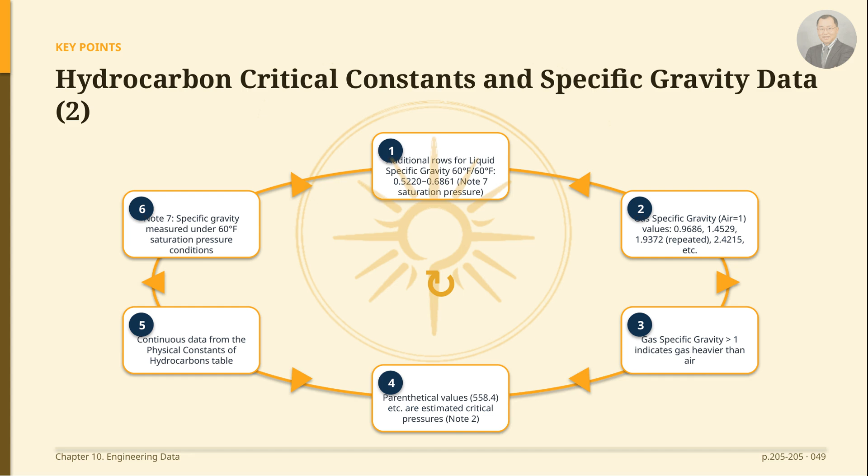Values in parentheses, such as 558.4, are estimated critical pressures. This set corresponds to the continued data of the hydrocarbon physical properties table.

I will introduce the boiling point column. This header is for the boiling point column, with a reference pressure of 14.696 psia and the unit in Fahrenheit. Since 14.696 psia corresponds to standard atmosphere pressure, or 1 atmosphere, the boiling point here refers to the temperature at which a liquid boils at atmospheric pressure.

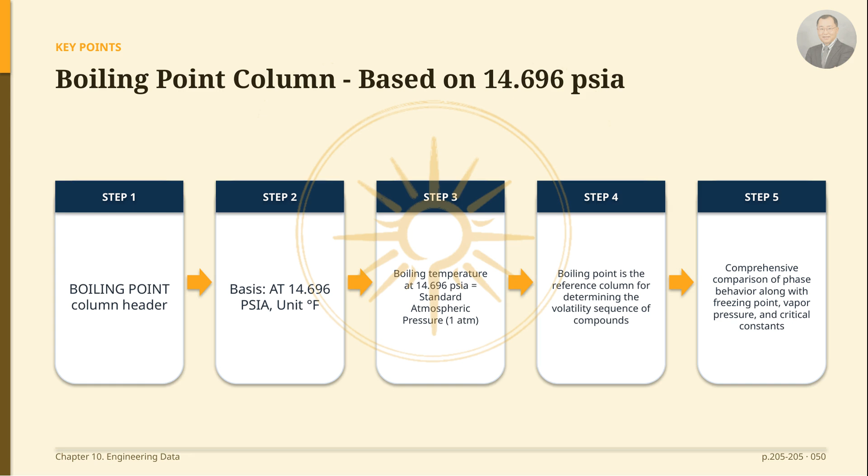The boiling point is the reference column for determining the volatility ranking of each hydrocarbon. When viewed together with the freezing point, vapor pressure, and critical constants, the phase behavior of a compound can be comprehensively compared. I will introduce the boiling point column within the hydrocarbon physical properties table of the engineering data chapter.

The header of this column specifies the reference pressure as 14.696 psia, which is standard atmospheric pressure, and lists the boiling point under that condition in Fahrenheit. Each hydrocarbon listed in the table, such as methane, ethane, and propane, has a boiling point value measured at this same 14.696 psia reference, so the table is structured to allow a direct comparison of the boiling points of different substances under the same pressure condition.

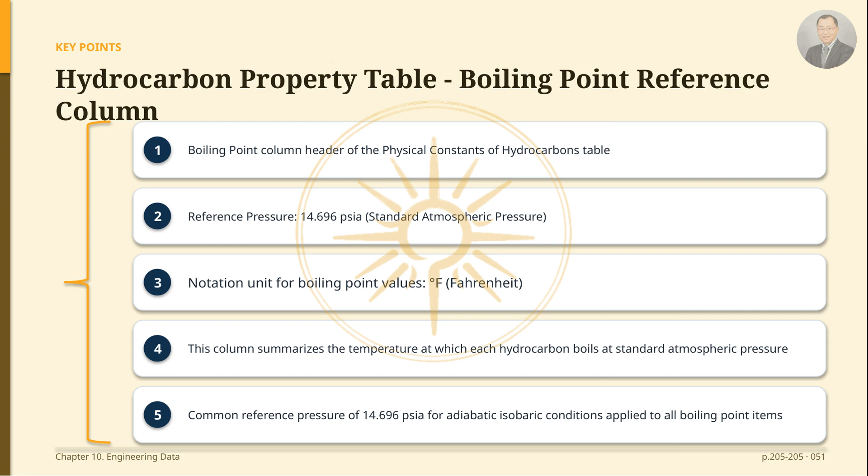This chunk summarizes the molecular weights and gas-specific gravity standards for aromatic hydrocarbons. Gas-specific gravity is expressed based on air equals 1 at 60 degrees Fahrenheit. Benzene has the chemical formula C6H6 with a molecular weight of 78.114. Toluene is C7H8 at 92.141, and ethylbenzene is C8H10 at 106.168. Interestingly, ortho, meta, and paraxylene all share the same formula, C8H10, and the same molecular weight of 106.168.

Additionally, acetylene is 26.038, styrene is 104.152, and isopropylbenzene is 120.195. The footnotes below the table distinguish the sources of the values.

Number 1 indicates calculated values. Number 2 in parentheses indicates estimated values. Number 5 refers to saturation pressure at the triple point, and number 6 refers to the sublimation point.

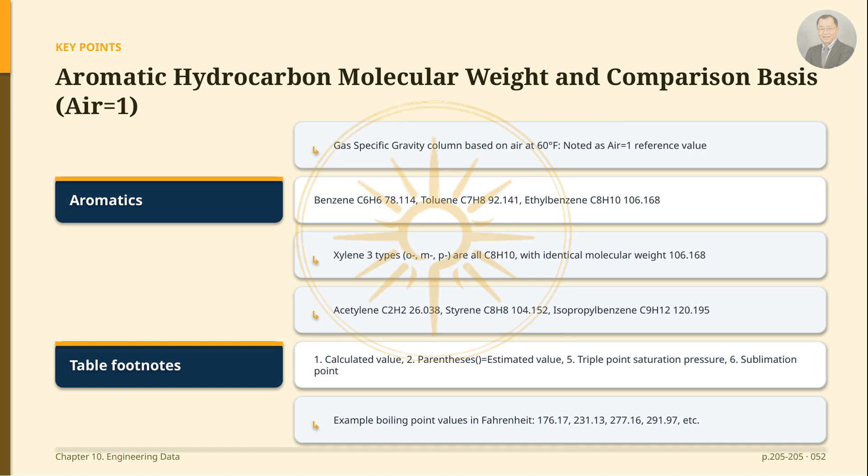Continuing in the same chunk, there is a table for the specific heat ratio of gases. The specific heat ratio, K, is the ratio of specific heat at constant pressure to specific heat at constant volume, and it is a key factor in valve sizing calculations for compressible fluids.

Acetylene is 1.38, air is 1.40, argon is 1.67, and butane is 1.17. Also, carbon monoxide is 1.40, carbon dioxide is 1.29, and ethane is 1.25. Helium is 1.66, hydrogen is 1.40, and methane is 1.26.

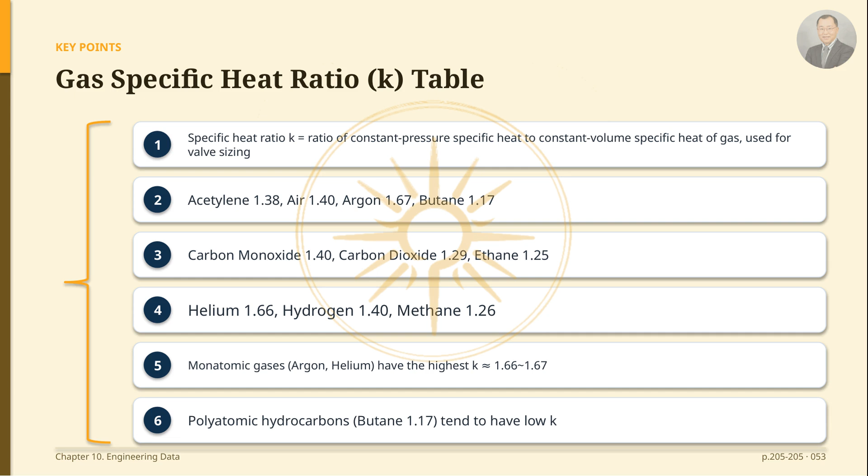Here, monatomic gases like argon and helium have the highest specific heat ratios, ranging from 1.66 to 1.67, while hydrocarbons with more atoms, such as butane, tend to have lower values around 1.17.

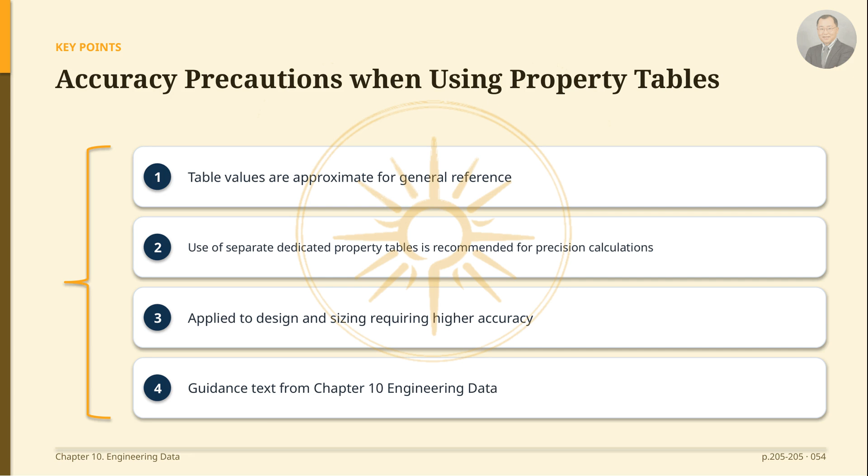This short chunk contains precautions when using property tables. Since the values in the hydrocarbon property table seen previously are general reference figures, it advises using dedicated property tables if higher accuracy is required. In other words, while these tables are acceptable for preliminary reviews, it is preferable to verify detailed property data specific to the substance for precise design or valve sizing calculations.

This chunk corresponds to the boiling point column header in the table summarizing critical constants and freezing points. Similar to the previous boiling point column, the reference pressure is set to 14.696 psia, which is standard atmospheric pressure, and the boiling point under that condition is expressed in degrees Fahrenheit.

In this table area, the boiling point is placed alongside critical temperature, critical pressure, and freezing point data, allowing for a side-by-side comparison of the phase behavior of each fluid.

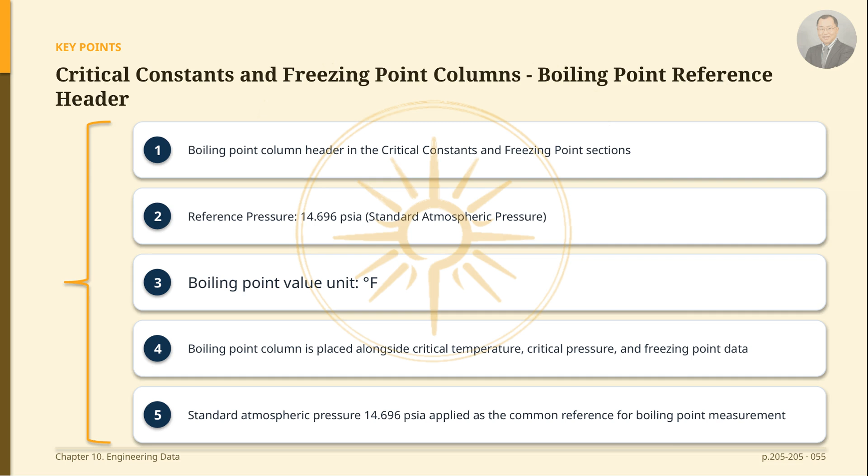This chunk refers to the header of the freezing point column and the subsequent vapor data column. The freezing point is also expressed in degrees Fahrenheit, with the reference pressure set to 14.696 psia, or standard atmospheric pressure. In the table, vapor-related data follows this freezing point column, providing comprehensive phase change temperature information for each fluid, along with the boiling point and critical constants seen earlier.

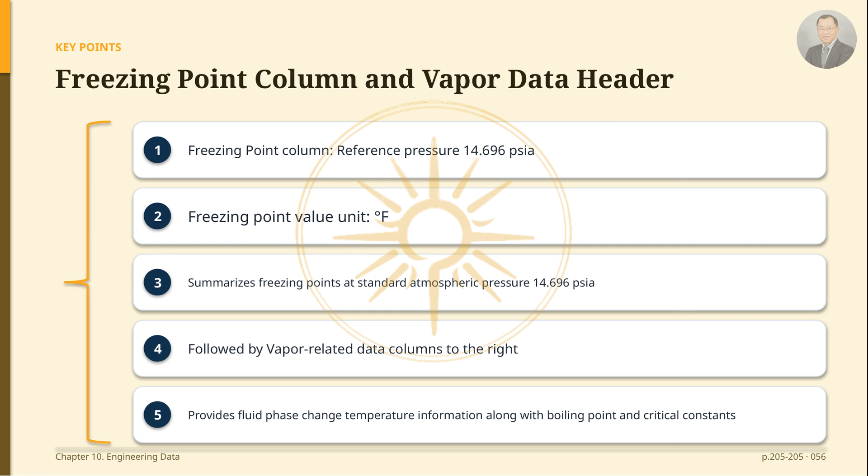This chunk is the header for the vapor pressure column. Vapor pressure uses 100 degrees Fahrenheit as the reference measurement temperature, and the unit is expressed in PSIA, which is absolute pressure. In the table, this vapor pressure data is placed after the freezing point and critical constant columns.

By comparing the vapor pressures of each fluid under the same condition of 100 degrees Fahrenheit, it can be used to estimate volatility and behavior related to cavitation and flashing.

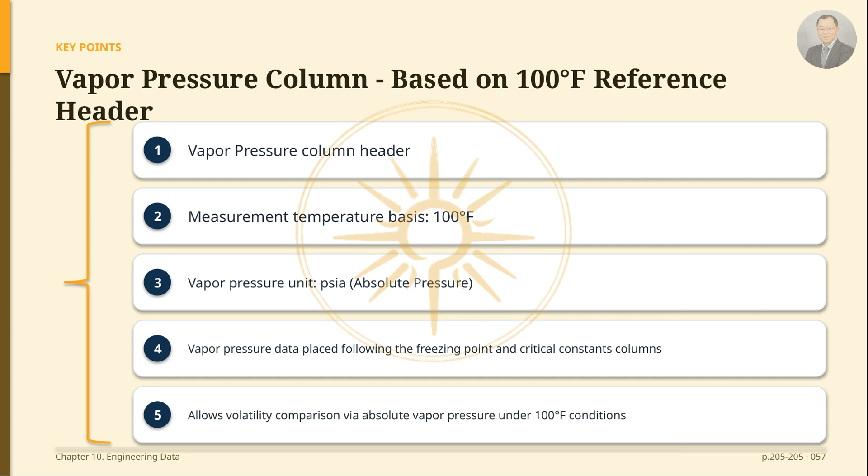Now, I would like to introduce the physical property tables for various fluids used in control valve sizing. This table presents the vapor pressure of each fluid at 100 degrees Fahrenheit in PSIA, while also summarizing critical pressure, critical temperature, and liquid-specific gravity.

Critical pressure is expressed in PSIA, and critical temperature is in degrees Fahrenheit. Liquid-specific gravity is shown as a ratio of 60 degrees Fahrenheit per 60 degrees Fahrenheit, meaning the liquid at 60 degrees Fahrenheit is compared to water at the same temperature. The critical temperature entries include negative values, with some as low as minus 140.8 degrees Fahrenheit.

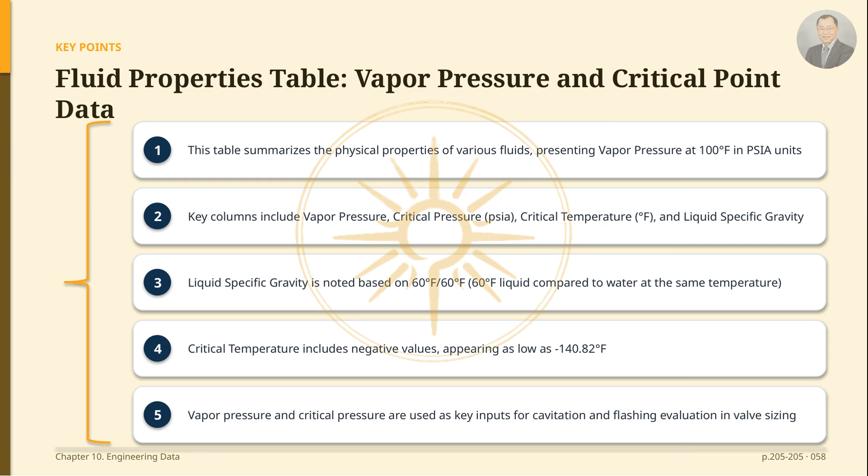These vapor pressures and critical pressures are important because they serve as key input values when evaluating cavitation or flashing phenomena in valves. Next, let's look at the key figures in the table.

Critical pressures range from approximately 465.4 PSIA to 706 PSIA, with values such as 552.2, 605.55, 651.24, 675, and 676.4 PSIA visible.

Vapor pressure at 100 degrees Fahrenheit ranges from about 0.188 to 3.224 PSIA, with more volatile fluids having higher values. Liquid-specific gravity, based on 60 degrees Fahrenheit per 60 degrees Fahrenheit, is between approximately 0.615 and 0.911, with most clustered between 0.86 and 0.91. Critical temperatures include both negative and positive values, from minus 140.8 degrees Fahrenheit to 55.86 degrees Fahrenheit.

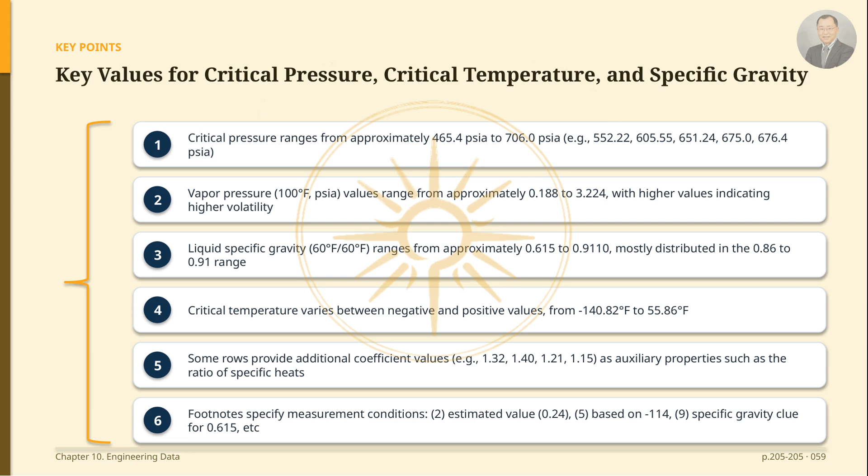Additionally, some rows provide auxiliary coefficients such as 1.32, 1.40, 1.21, and 1.15, which represent additional properties like the specific heat ratio. The footnotes in parentheses specify measurement conditions, such as number 2 being an estimated value of 0.24, number 5 being a reference value of minus 114, and number 9 providing a clue for the 0.615 specific gravity, so please check them when using the table.

I would like to introduce the concluding part of the previous hydrocarbon physical constants table. In this chunk, a specific heat ratio K value of 1.33 is presented at the end. The specific heat ratio K is the ratio of specific heat at constant pressure to specific heat at constant volume, and it is a key variable for correcting compressibility effects when calculating gas flow rates.

The preceding table summarized gases such as natural gas, nitrogen, oxygen, propane, propylene, and steam based on a specific gravity of 0.6, with the steam entry having a separate condition in footnote 1.

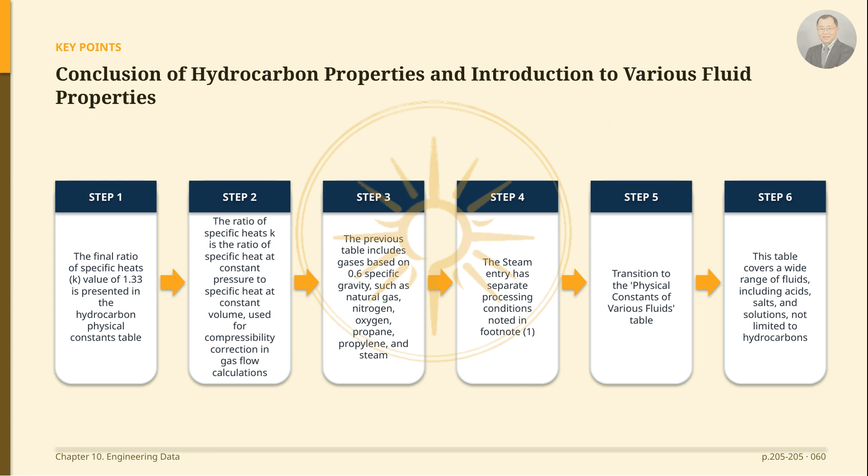From this point, we move to the physical constants of various fluids table. This table is characterized by covering a wide range of fluids, including acids, salts, and aqueous solutions, not just hydrocarbons.

I would like to introduce the boiling point header within the column structure of the physical constants table for various fluids. The first data column of this table is the boiling point. The reference pressure is 14.696 PSIA, which corresponds to standard atmospheric pressure. Temperatures are expressed in degrees Fahrenheit. Each row is categorized by the fluid name.

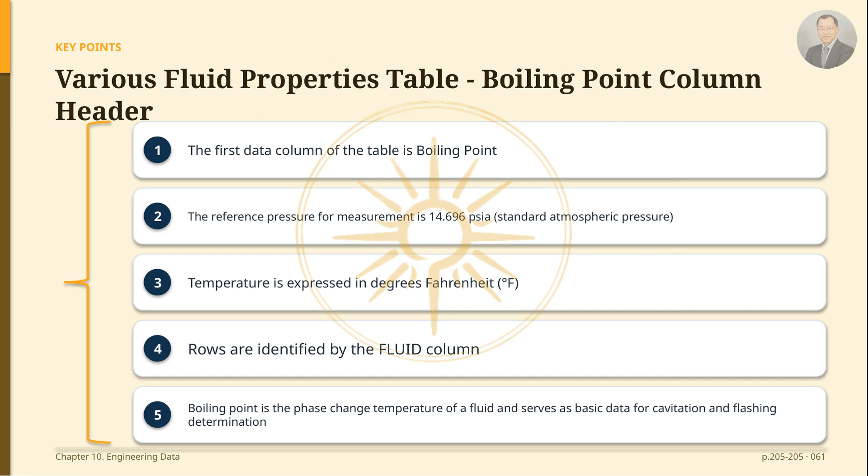Since the boiling point is the temperature at which a fluid changes phase from liquid to gas, it serves as basic data for determining whether cavitation or flashing will occur in a valve.

I will now provide a detailed introduction to the first data block of the physical constants table. The table consists of the fluid name, chemical formula, molecular weight, boiling point, freezing point, liquid-specific gravity, and gas-specific gravity, in that order. First, acetic acid has the chemical formula HC2H3O2, a molecular weight of 60.05, and a liquid-specific gravity of 1.05.

Acetone is C3H6O, with a molecular weight of 58.08, liquid-specific gravity of 0.79, and gas-specific gravity of 2.01.

Air is denoted as N2O2, with a molecular weight of 28.97, a boiling point of minus 317 degrees Fahrenheit, a freezing point of minus 221 degrees Fahrenheit, liquid-specific gravity of 0.86, and gas-specific gravity of 1.0.

Ethyl alcohol is C2H6O, with a molecular weight of 46.07, a vapor pressure of 2.3, and a specific gravity of 0.794.

Methyl alcohol is CH4O, with a molecular weight of 32.04, vapor pressure of 4.63, and specific gravity of 0.796.

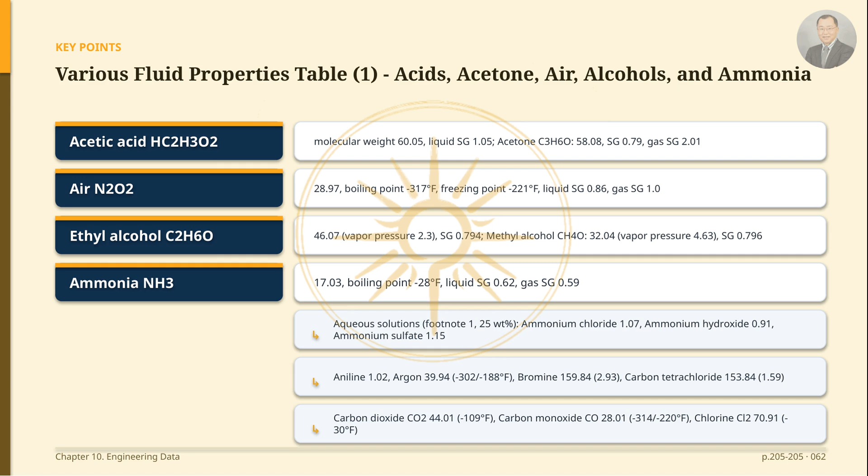Chlorine is Cl2, with a molecular weight of 70.91 and a boiling point of minus 30 degrees Fahrenheit. The table continues at the end with chromic acid, citric acid, and copper sulfate aqueous solution at 1.17.

I would like to introduce the vapor pressure column header of the physical constants table. This column represents the vapor pressure, with a reference temperature of 70 degrees Fahrenheit. The pressure unit is psig, based on gauge pressure.

Being gauge-based means that atmospheric pressure is set as 0, and any pressure exceeding that is displayed. Since vapor pressure is the pressure at which a fluid tends to evaporate at a given temperature, it is used to evaluate the risk of flashing occurring downstream of a valve.

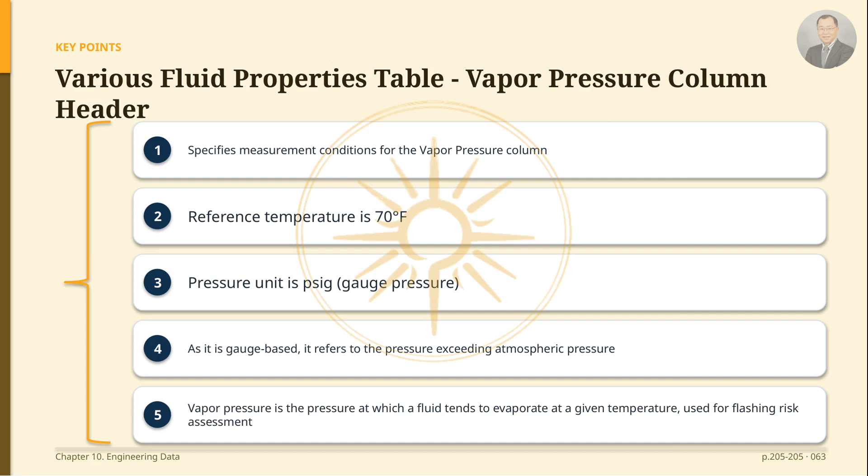I will now introduce the headers for the specific gravity and critical temperature columns in the physical constants table. This section contains the headers for specific gravity and critical temperature. The unit for critical temperature is degrees Fahrenheit.

The specific gravity column is further subdivided in the following chunk into liquid and gas bases, specifically based on 60 degrees Fahrenheit. Critical temperature refers to the limit temperature above which a gas cannot be liquefied regardless of how much the pressure is increased. These critical point properties serve as an important basis for judgment when selecting valves for supercritical fluids or high-pressure services.

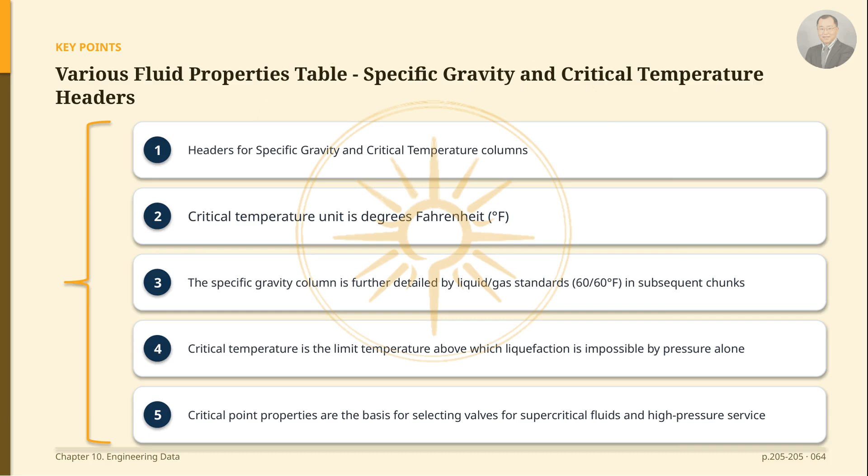I will introduce the critical pressure column, the specific gravity reference, and the continuation of the table. The unit for the critical pressure column is psia, based on absolute pressure.

Specific gravity is noted based on 60 degrees Fahrenheit for liquids and based on gas for gases. Critical pressure refers to the minimum pressure required to liquefy a gas at the critical temperature.

At the end of this chunk, there is an indication that the physical constants table continues, showing that the table extends to the next page.

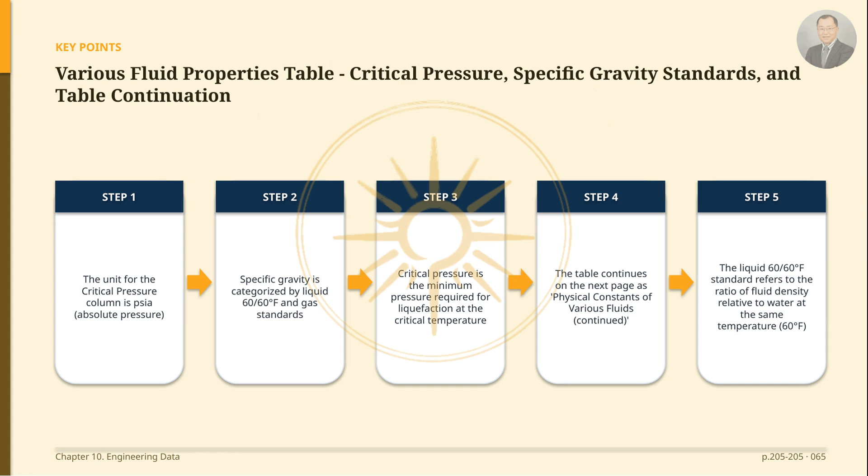For reference, writing liquid-specific gravity as 60 degrees Fahrenheit means the ratio of the fluid density to the density of water measured at the same 60 degrees Fahrenheit.

I would like to introduce the boiling point column of the fluid properties table. This column shows the boiling point of each fluid in degrees Fahrenheit, based on 14.696 psia, which is 1 atmosphere of standard atmospheric pressure. Since the boiling temperature changes if the pressure changes, even for the same substance,

the table fixes the pressure reference at 14.696 psia so that all fluids can be compared under the same conditions. This boiling point value serves as the starting point for reading the subsequent fluid data table.

The boiling point column we saw previously continues with the same header in the next section because the table is long. The reference pressure remains 14.696 psia, and the values are in degrees Fahrenheit.

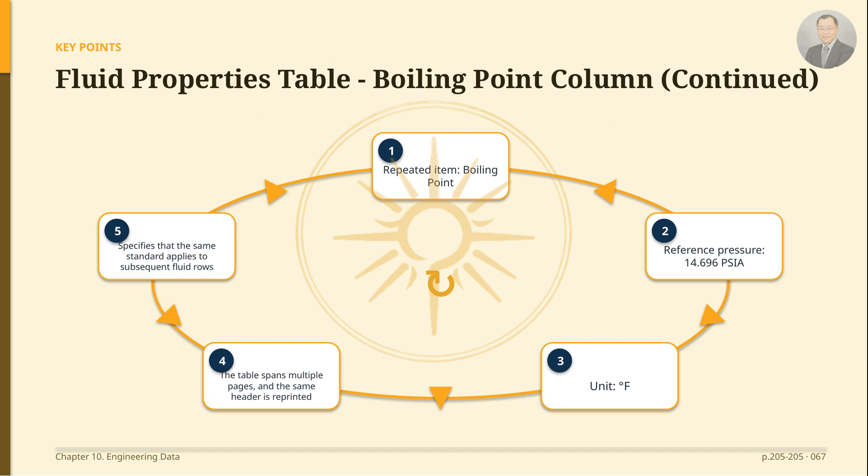Since the table is continuous across multiple rows and pages, confirming that this same boiling point reference applies to the subsequent fluid rows allows you to read the table without interruption.

This table summarizes the molecular weight, boiling point, and specific gravity of general non-hydrocarbon fluids. Each row is read in the order of fluid name, chemical formula, molecular weight, boiling point in degrees Fahrenheit at 14.696 psia,

and then gas-specific gravity and liquid-specific gravity. Gas-specific gravity is a relative value with air set as 1, and liquid-specific gravity is based on 60 degrees Fahrenheit versus 60 degrees Fahrenheit. For example, ether has the chemical formula (C2H5)2O, a molecular weight of 74.1, a gas-specific gravity of 0.74, and a liquid-specific gravity of 2.55.

Fluorine is F2, with a molecular weight of 38 and a boiling point of -305 degrees Fahrenheit.

Helium is He, with a molecular weight of 4.003, a very low boiling point of -454 degrees Fahrenheit, and a light specific gravity of 0.18. Hydrogen is H2, with a molecular weight of 2.016, a boiling point of -422 degrees Fahrenheit, and a specific gravity of 0.07.

Hydrogen sulfide is H2S, with a molecular weight of 34.07 and a boiling point of -76 degrees Fahrenheit, and hydrogen chloride is HCl, with a molecular weight of 36.47 and a boiling point of -115 degrees Fahrenheit.

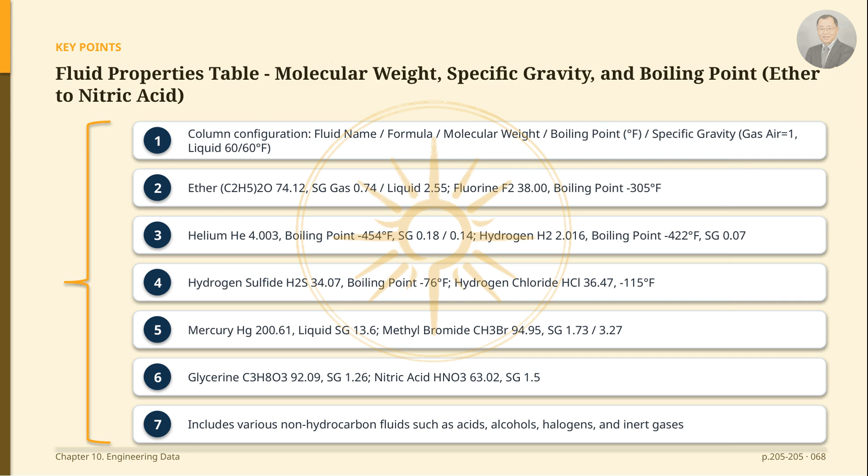I would like to introduce the vapor pressure column of the fluid properties table. This value is the vapor pressure measured at 70 degrees Fahrenheit, and the unit is gauge pressure. Vapor pressure indicates the tendency of a fluid to evaporate at that temperature; the larger the value, the more easily it vaporizes at the same temperature. Following the boiling point and specific gravity columns seen earlier, this vapor pressure column is organized as an additional property for the same fluid row.

As the table grows longer, the vapor pressure column continues with the same header in the next section. The measurement reference remains 70 degrees Fahrenheit, and the unit is gauge pressure. Since the table is continuous over several rows, the vapor pressure values for the subsequent fluids should all be read as gauge pressure at 70 degrees Fahrenheit.

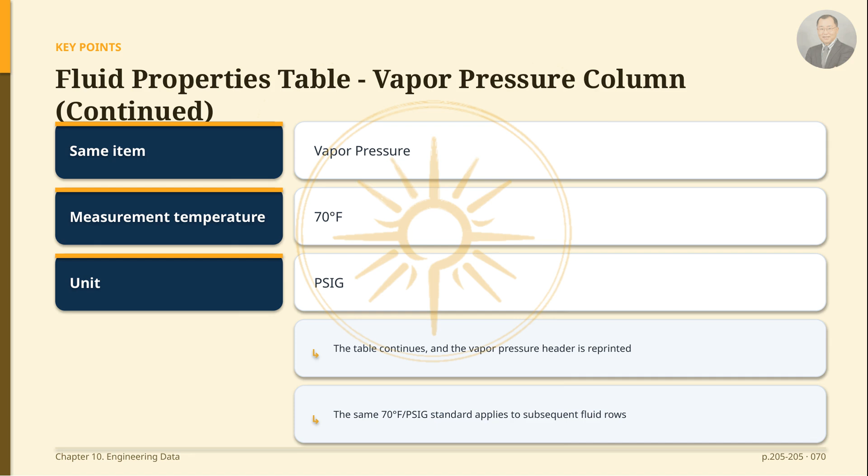I will introduce the specific gravity, critical pressure, and critical temperature columns that conclude the fluid properties table. The specific gravity column represents the relative density of the fluid, the critical pressure column shows the critical pressure in PSIA, and the critical temperature column shows the critical temperature in degrees Fahrenheit.

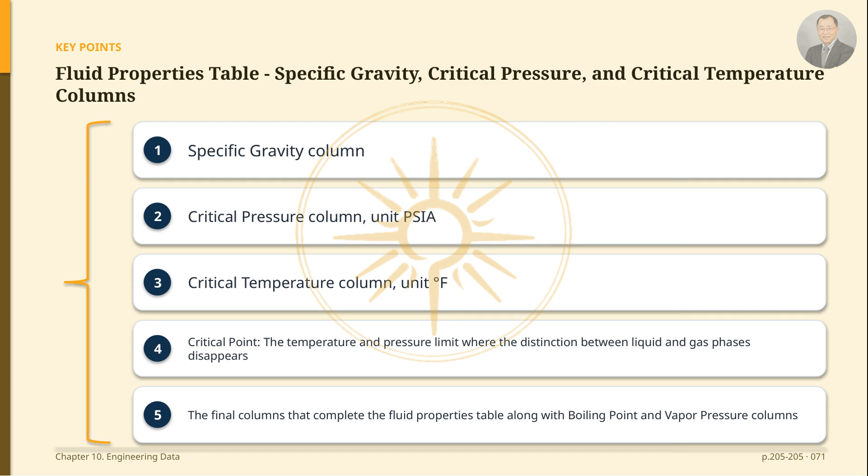The critical point refers to the limit of temperature and pressure above which the distinction between liquid and gas disappears. By knowing both the critical pressure and critical temperature, one can determine the region where a fluid behaves as a supercritical fluid. With these three columns added to the boiling point and vapor pressure columns, you can check everything from the molecular weight to the critical properties of each fluid in one table.

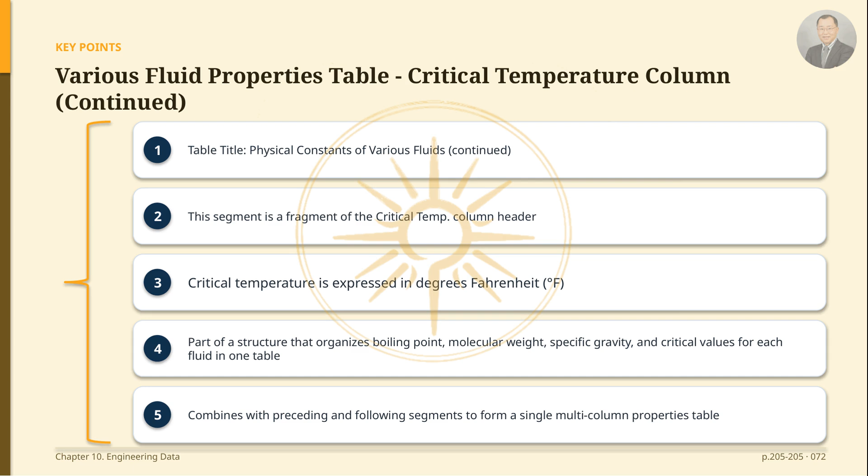I would like to introduce a continuation of the table summarizing the physical constants of various fluids. This segment corresponds to the header of the critical temperature column. The unit for critical temperature is expressed in degrees Fahrenheit. This table is structured to list values such as molecular formula, molecular weight, boiling point, specific gravity, and critical temperature and pressure horizontally for each fluid, and the part you are seeing now is the header fragment pointing to the critical temperature column. Please keep in mind that this must be combined with the preceding and following fragments to form a complete multi-column properties table.

This fragment is the header for the boiling point column of the fluid properties table. Here, the boiling point is defined as the value measured under standard atmospheric pressure conditions of 14.696 PSIA. The unit is degrees Fahrenheit. It is important to remember that 14.696 PSIA is based on absolute pressure. Because they were measured at the same pressure reference, the boiling points of the various fluids listed in the table can be compared directly.

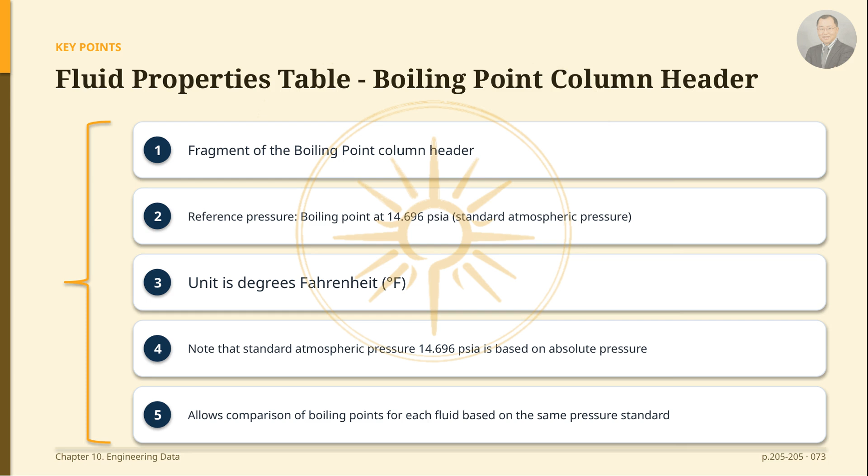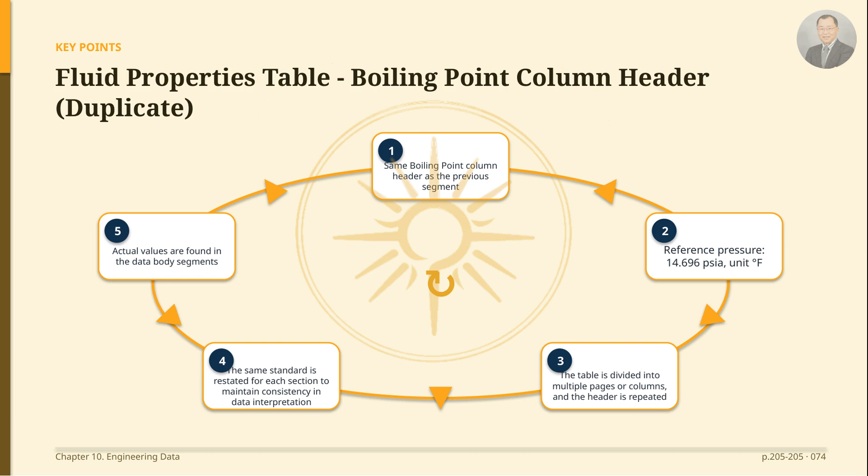This fragment is also a boiling point column header with a reference pressure of 14.696 PSIA and units in degrees Fahrenheit. Since the properties table is divided into multiple pages and columns, the same header appears repeatedly. Repeating the same pressure reference for each column is to maintain consistency, so that the data can be interpreted using the same standard regardless of which part of the table is being read. You can find the actual boiling point values in the subsequent data body fragments.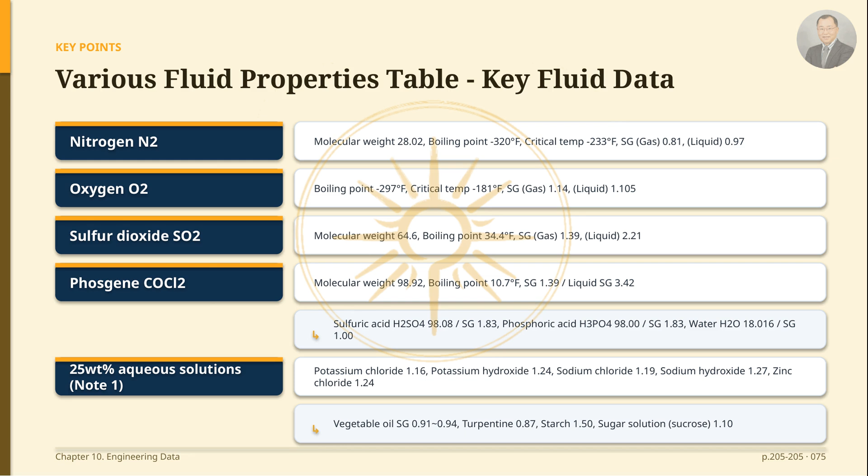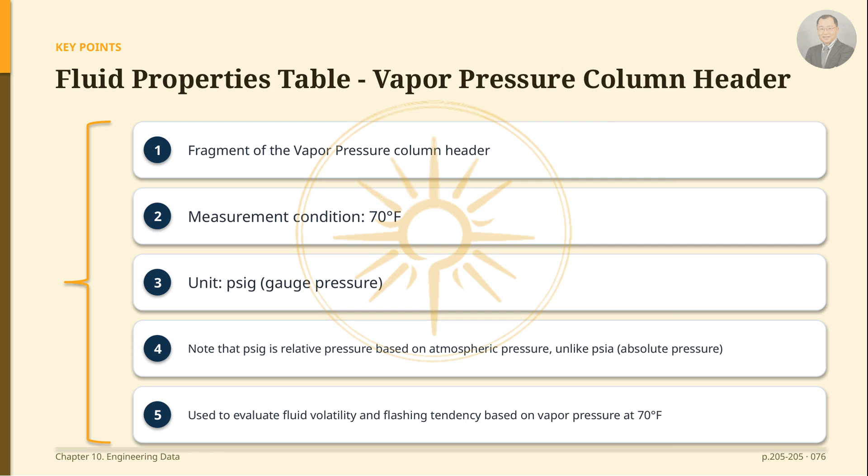This fragment is the header for the vapor pressure column of the fluid properties table. The measurement condition is 70 degrees Fahrenheit, and the unit is psig, which is gauge pressure. Unlike the psia used for the boiling point, which was absolute pressure, you must distinguish that psig is relative pressure based on atmospheric pressure. The vapor pressure value at 70 degrees Fahrenheit is used to evaluate the volatility of the fluid and its tendency for flashing or cavitation inside the valve.

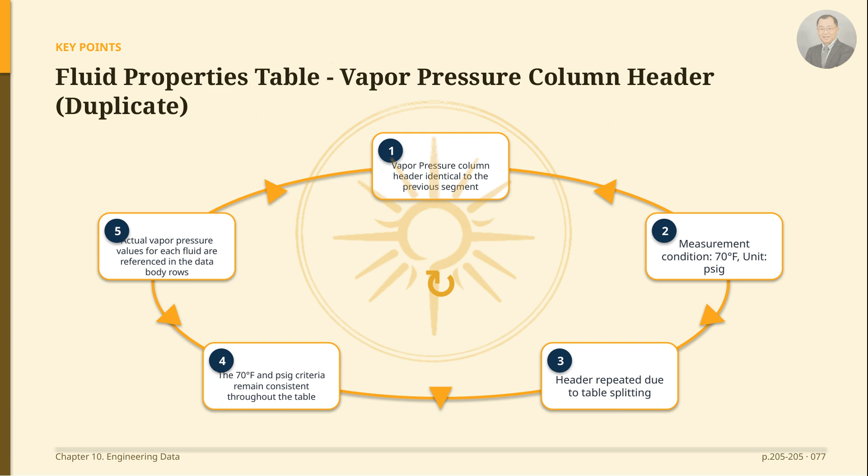This fragment is also a vapor pressure column header with a measurement condition of 70 degrees Fahrenheit and units in psig. This is a part where the same header reappears as the properties table is divided into several columns. Since the standards of 70 degrees Fahrenheit and psig are maintained consistently throughout the table, you can read the vapor pressure under the same conditions regardless of which column you are viewing. Please refer to the data body rows for the actual vapor pressure values of each fluid.

I would like to introduce the header items used to determine the state of compounds in the hydrocarbon physical constants table. The specific gravity listed here refers to the liquid's specific gravity based on 60 degrees Fahrenheit versus 60 degrees Fahrenheit. Critical pressure is expressed in psia, and critical temperature is given in degrees Fahrenheit. These three values are key physical properties used as a basis to determine whether each compound is a gas or a liquid under given operating conditions and to perform conversion calculations necessary for valve sizing. In the body of the table, these items are provided as specific numerical values for each compound.

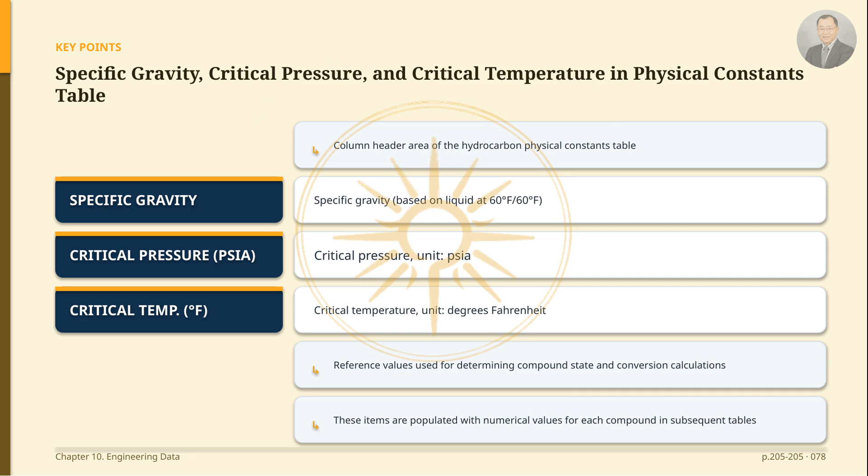I would like to introduce the unit notation for the critical temperature column. The values in this column are given in degrees Fahrenheit. Critical temperature refers to the upper temperature limit above which a compound can no longer be liquefied, no matter how much the pressure is increased. In other words, in the region above this temperature, liquefaction does not occur through pressure alone.

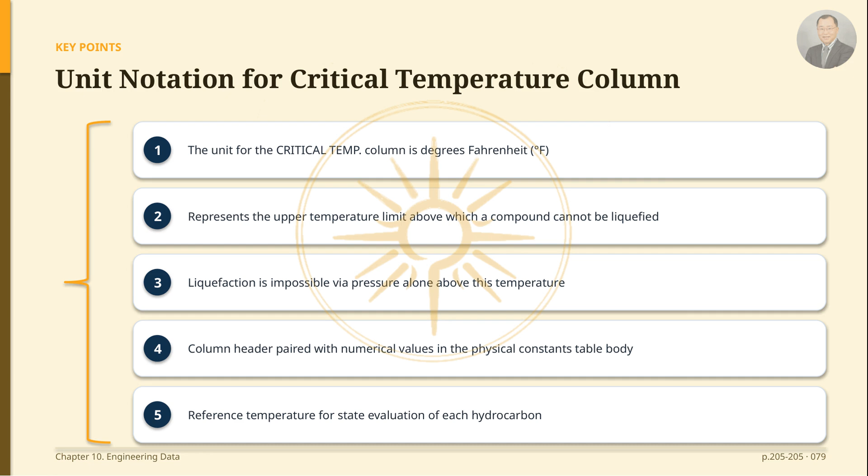This header pairs with the critical temperature values filled for each compound in the physical constants table, serving as the reference temperature for evaluating the state of each hydrocarbon.

I would like to introduce the volume column, which represents specific volume. The unit for this column is cubic feet per pound. That is, it is the specific volume, meaning the volume occupied by a unit mass of 1 pound. Specific volume is the reciprocal of density, which is pounds per cubic foot, appearing later. This value is provided as a state property for each temperature in the saturated vapor and saturated liquid state tables, and it is a reference item when converting flow rates to a volumetric basis or calculating volume.

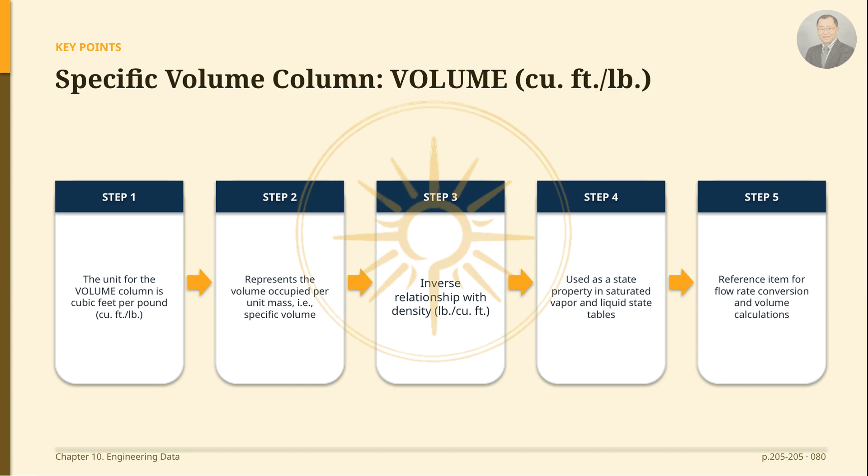I would like to introduce the density column. The unit for this column is pounds per cubic foot. Density refers to the mass contained in a unit volume and is the reciprocal of the specific volume or cubic feet per pound, explained previously. This value is included as a state property in the saturated liquid and saturated vapor state tables and is used when converting between mass-based flow rates and volume-based flow rates.